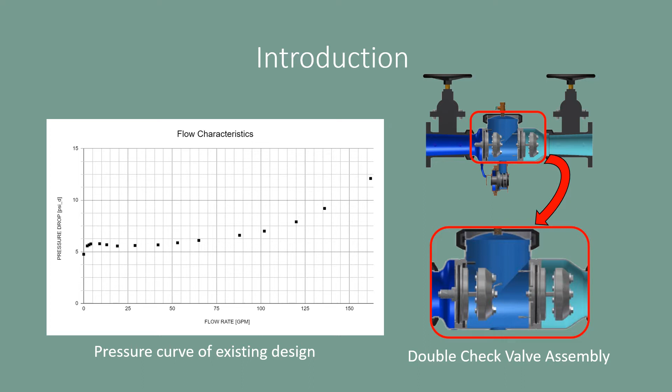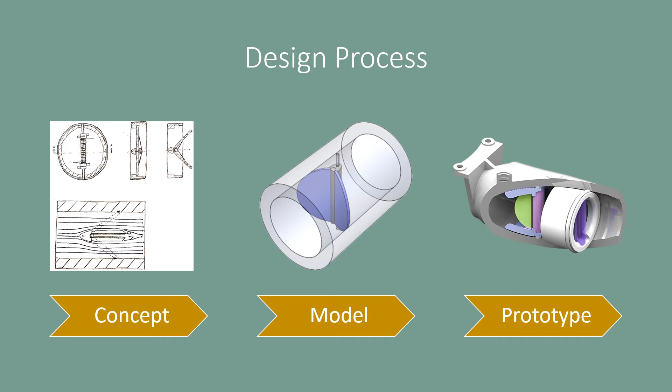The goal of this project was to produce a check valve design and prototype that would lower the pressure loss comparative to existing Zurn check valve products. The design process that our team adopted was an iterative design, build, and test cycle. Early models of the double disc included static designs where steady-state testing was conducted as a baseline, and later on, final prototyping integrated torsion springs, dynamic valve poppets, and functional seals.

So here you can see a picture of our final design. This has two identical check valves. This is for ease of manufacturing as well as ease of replacement and maintenance on the valves. The valves themselves are in yellow and orange, and they're separated by that purple spacer.

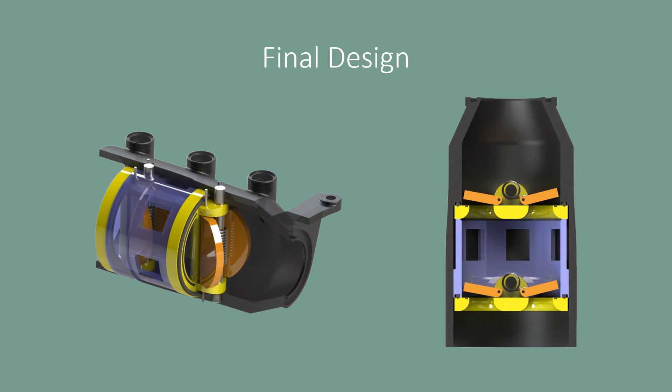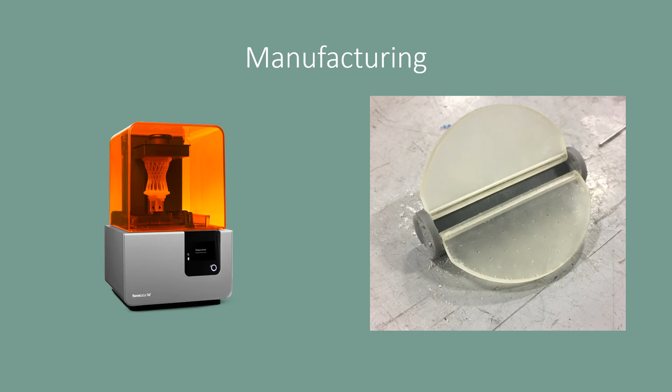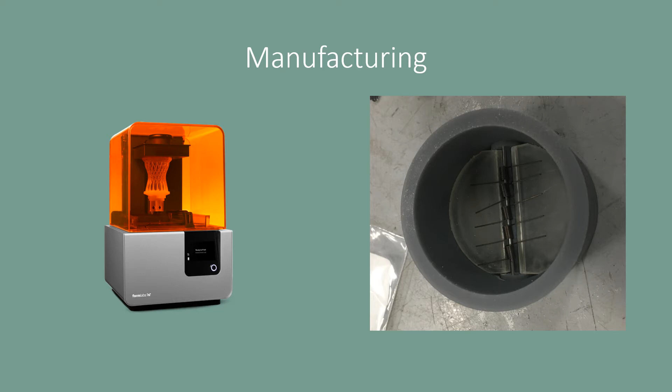We first printed the components on Zurn's 3D printer out of SLA, and then sanded away any interferences that came due to the tolerance of the printer. We then inserted the pins to hold back the poppets and the springs, and then inserted that whole assembly within the check frame. This then had all of the seals inserted, and then the whole frame was placed in the backflow housing for testing.

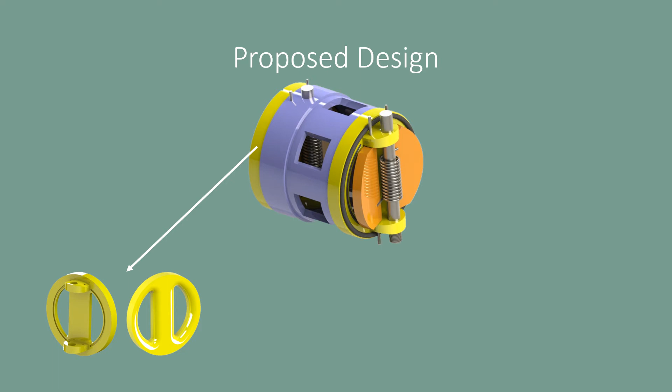In our proposed final design, the check hinges in yellow feature a dovetail groove which helps hold the seals in place. The spacer acts as a sealing surface between the upstream and downstream check. Finally, the poppets are held back by the torsion spring, which is rated to meet standards in industry for fatigue.

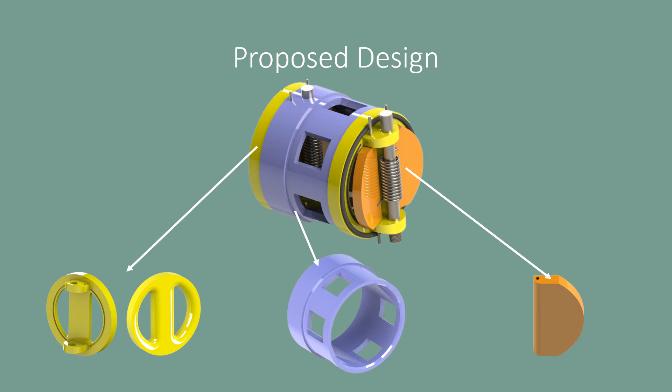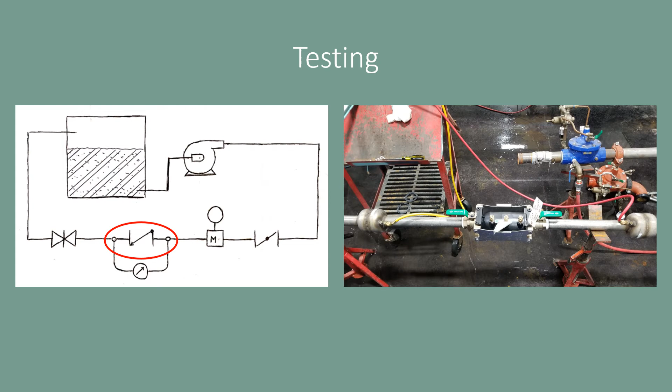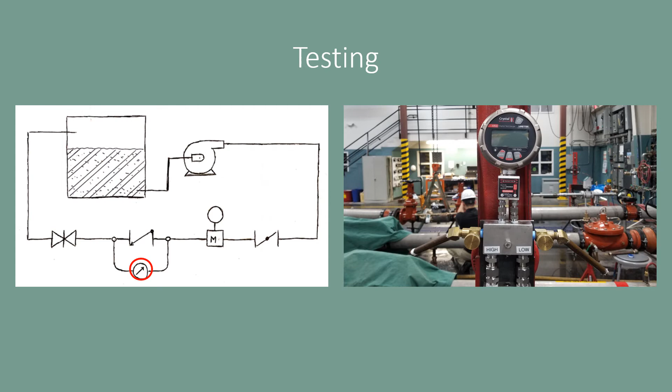In order to test our designs, we use Zurn's wet lab facility. The test apparatus is composed of a storage tank that circulates water in a closed loop. This is where we install the check valve to be tested. We use this needle valve to control the flow rate throughout the test, gathering data at approximate intervals of 10 gallons per minute. The pressure is recorded from the pressure differential gauge in PSID, and the flow rate is measured through the magnetic flow meter, or magmeter.

The primary engineering analysis we performed was with CFD, or computational fluid dynamics. In this first render, we can see a cut plane of the test stand with no check valve installed. The purpose of this simulation was to determine the validity of our model by comparing it to physical test data. Our simulation came within 4% of the test data. Colors here represent the pressure gradient across the valve.

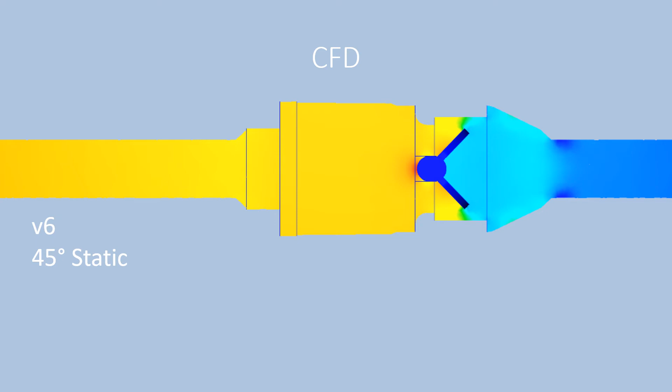These next two renders show the pressure gradient across the V6 prototype in a static configuration, one at 45 and the other at 90. This simulation is a transient model and has flow-driven angular motion defined for the poppets. The torsional spring was modeled with a resistive element and appropriate parameters. This model was able to closely replicate test data to within 20% error.

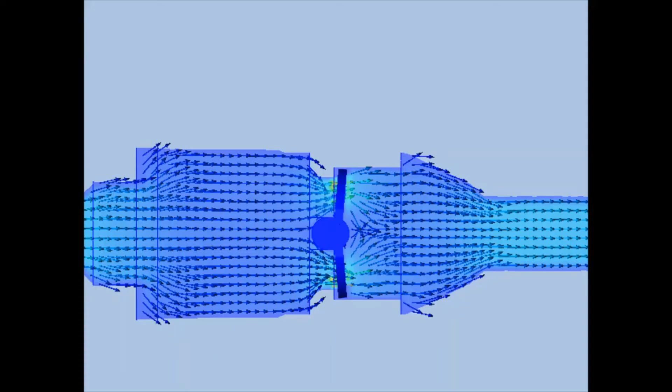Here is an animation of the transient model. This cut plane shows the velocity field developed with both vectors for direction and color for magnitude. The presence of vortices can be observed.

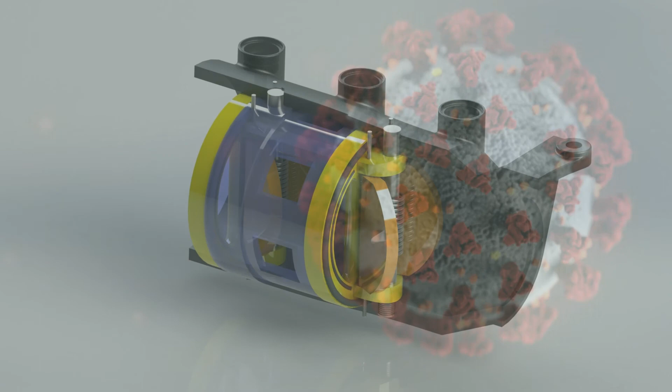Unfortunately, the COVID-19 situation severely reduced our potential to progress the project to where we wanted it to be. This is because our project's forward progress heavily relied upon live test data results to drive the next design changes of the check valve. Regardless, we believe that the work we have completed serves as a strong foundation that Zurn engineers will be able to build off of in order to integrate the double disc into an operational check valve for water supply lines. Please feel free to explore our project webpage for further information.